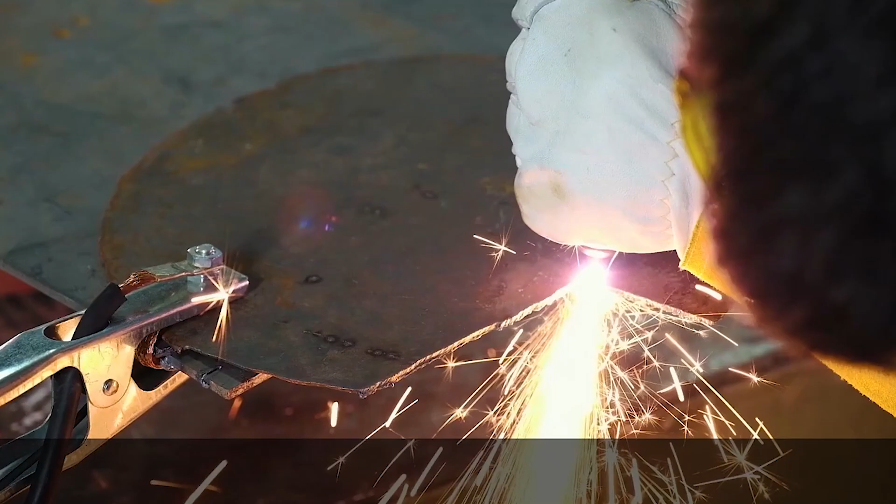Albert Welding presents 3-in-1, a multifunctional MMA, cut and TIG machine. This machine provides outstanding functionality and reliability. You can either cut with plasma, weld, or use TIG with just one single device. In each of these processes, the machine performs all the advantages of the inverter welder.

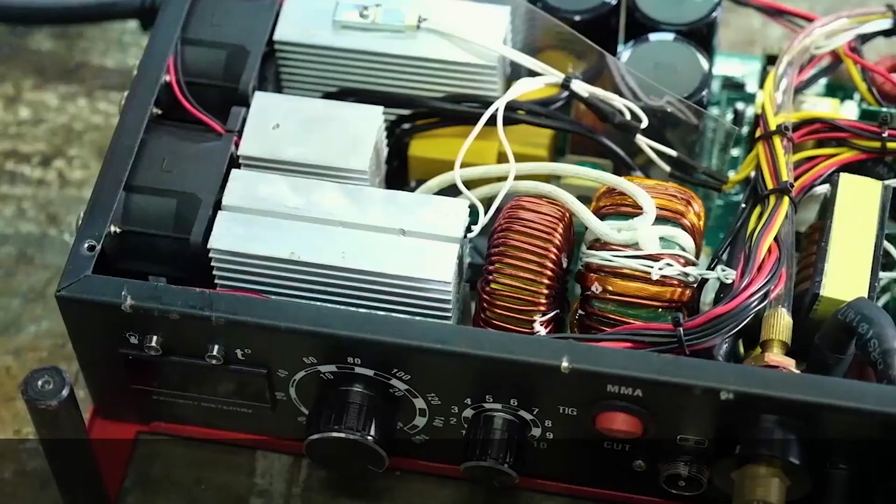Soft and stable arc during MMA. Powerful high-frequency injection unit provides soft and touch-free ignition at TIG. With high-frequency ignition for cut, you may even not touch the working metal.

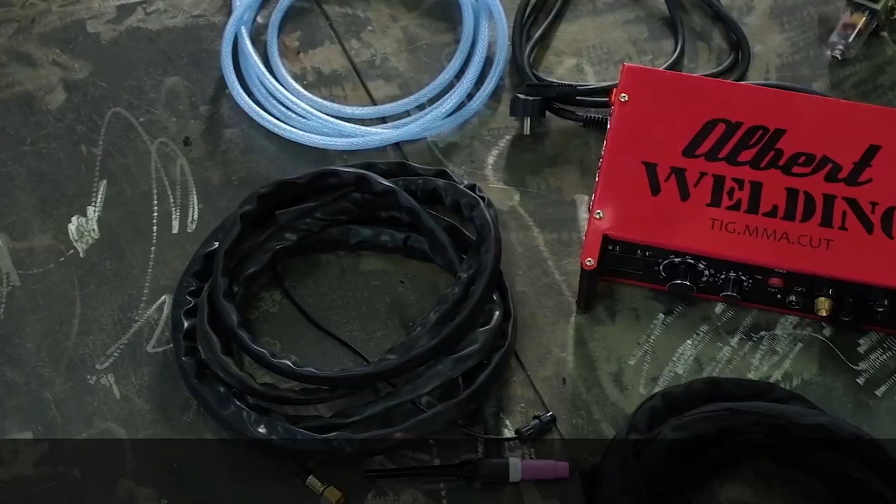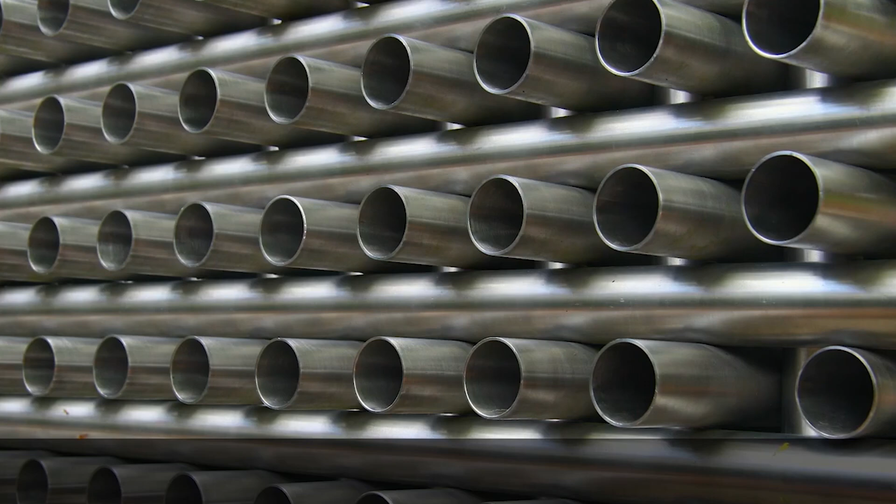It is easy to start using this machine immediately and in any field: car service, house building and construction, mechanical works or production. This machine may be useful for house maintenance office specialists, as it not only allows you to cut a workpiece, but also weld some metal structures made of steel, stainless steel or copper.

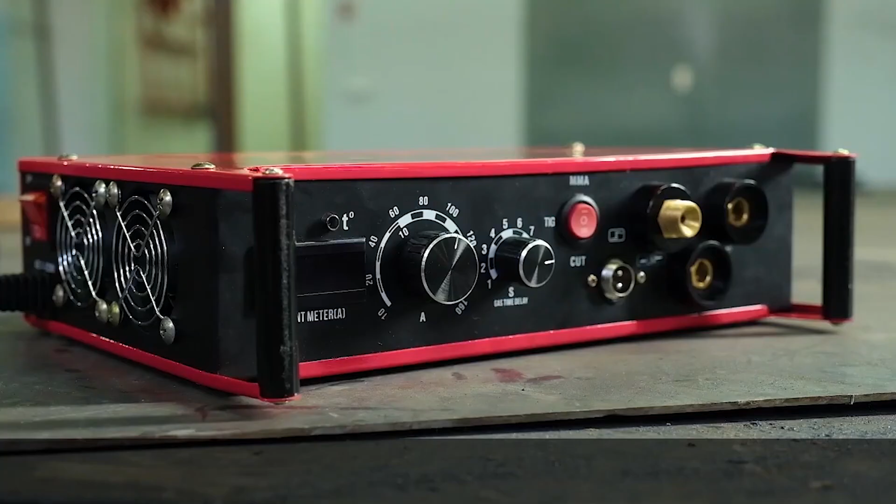Albert Welding 3-in-1 works with a regular mains power supply of 220 volts, which makes it possible to use it almost everywhere. Steady operation is maintained even if voltage drops down to 140 volts.

The weight of the machine is just 4 kilograms 600 grams. Machine overall dimensions: length 32.5 centimeters, width 29 centimeters, height 8 centimeters.

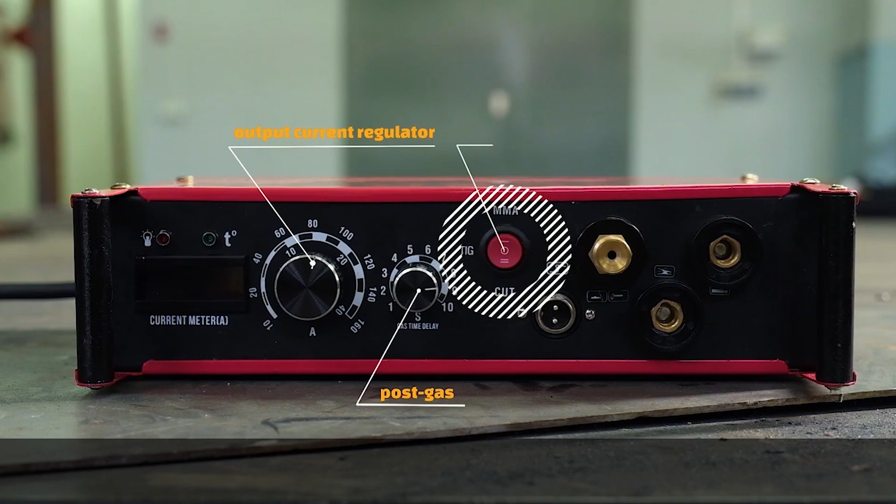On the front panel, you can see the output current regulator, post-gas function control regulator knob, which helps protect the beam from combustion at TIG, MMA, TIG, and cut switch knobs, output current display, power light, overheating and mains failure detection lights.

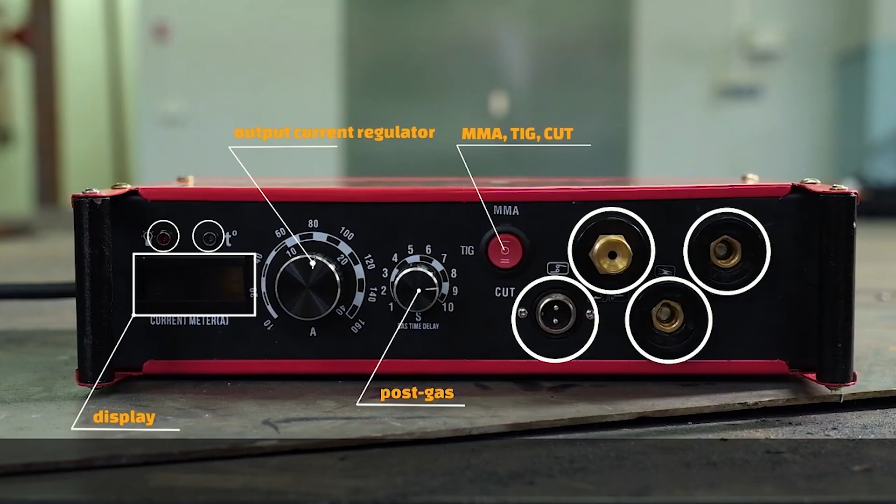On the right side of the front panel, you can see a quick detachable MMA connector, plasma cutter torch and TIG torch connectors, plasma generator and torch remote control connector. From the left and right of the front panel, you can also find shoulder strap holders. You can also use the carrying handle to easily move the machine around.

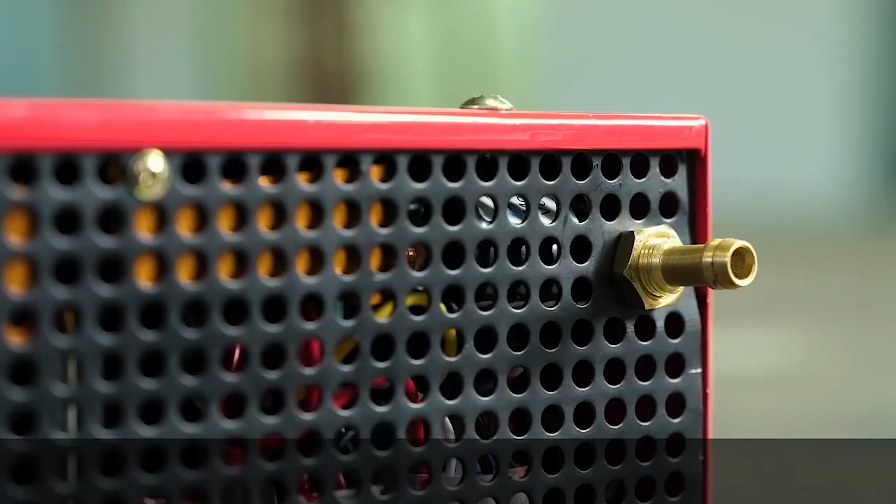On the left side of the machine, there are cooler grills and a power on-off button, as well as the mains cable input. On the right side of the device, you can find a pressure valve filter for the cut function, and argon input for TIG. Please note that to use the cut function, you would need to connect a small air pump. To ensure steady work, it would need just 4 to 5 bars of pressure.

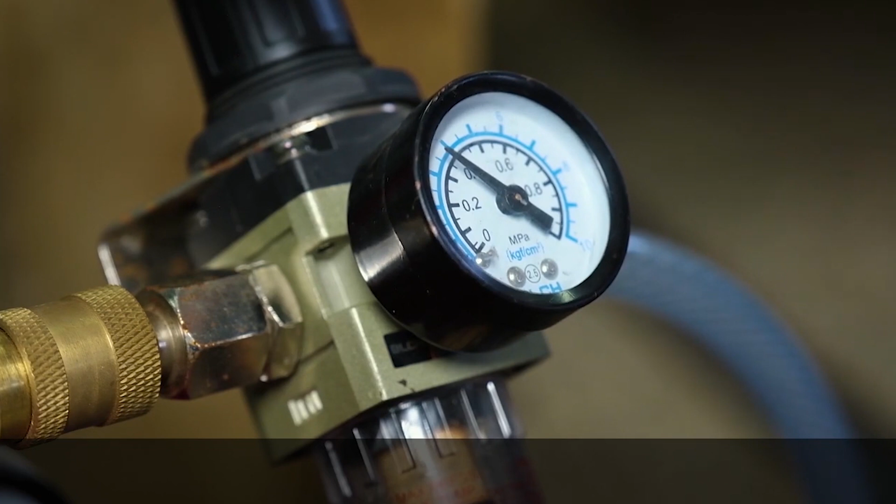Main specifications of Albert Welding 3-in-1: maximum output current, MMA 160 amps, cut 40 amps, TIG 160 amps.

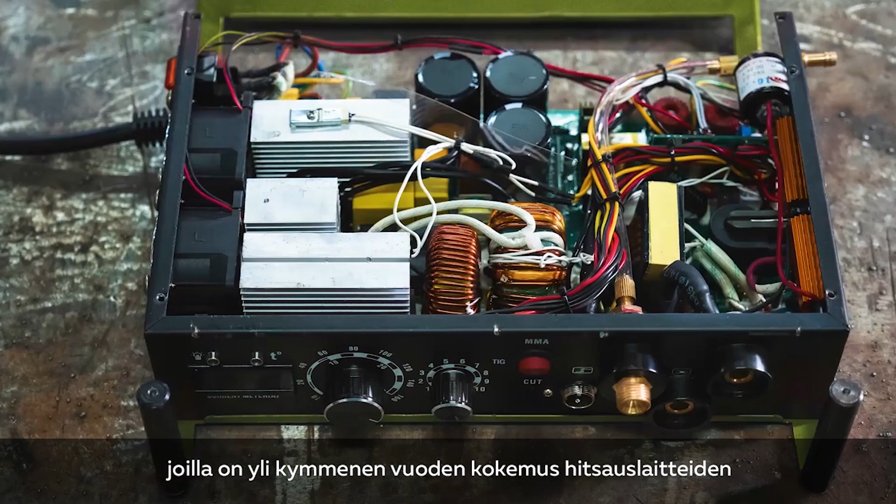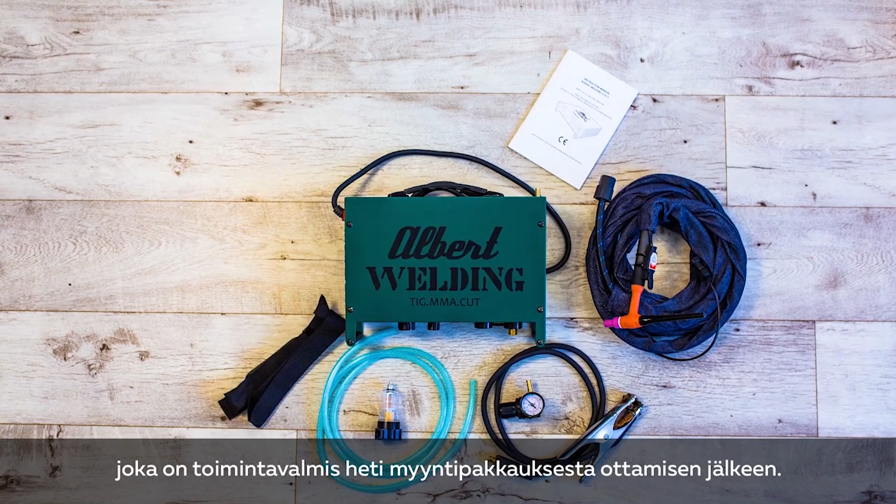Albert Welding is a team of professional engineers with over 10 years of experience in production of welding equipment. Since 2017, we raised our seed investments, registered our patents, and upgraded our prototype to a production model. Our engineers created a product which is ready to work right out of the box. Albert Welding 3-in-1 is a mature production model ready to be sold and marketed.

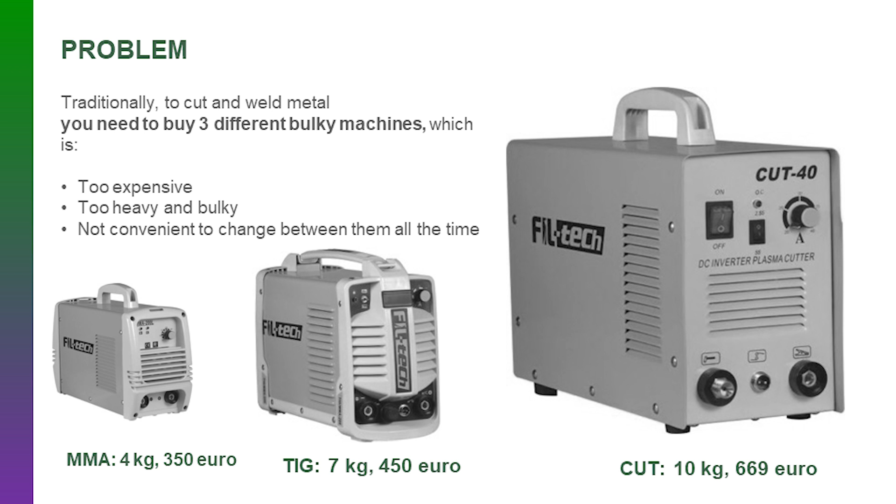Yeah, thank you. So, my name is Sergey, and today we're speaking about the future of metal welding and cutting. Today the problem is that to weld and cut metal you would need 3 different bulky and heavy machines, which is totally inconvenient to switch all the time between them and definitely very expensive.

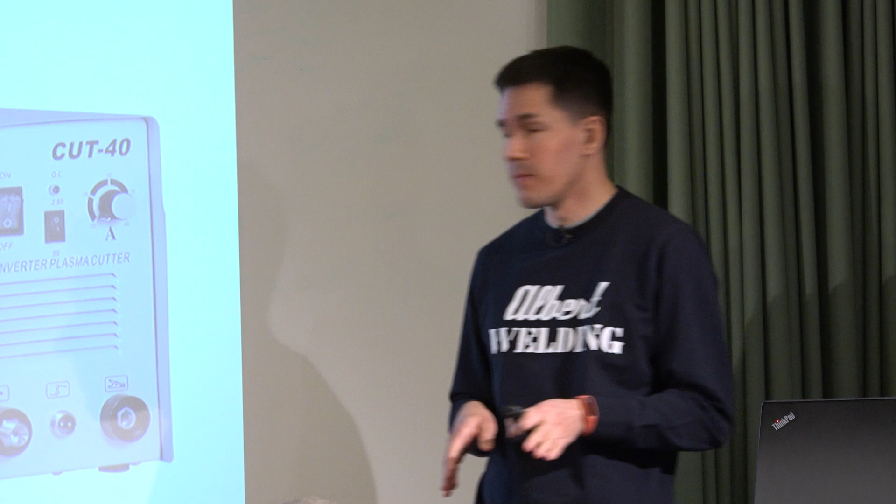But we have a solution. This is Albert Welding 3-in-1, patented technology, our proprietary technology, the most lightweight and portable 3-in-1 welding and cutting machine in the world right now.

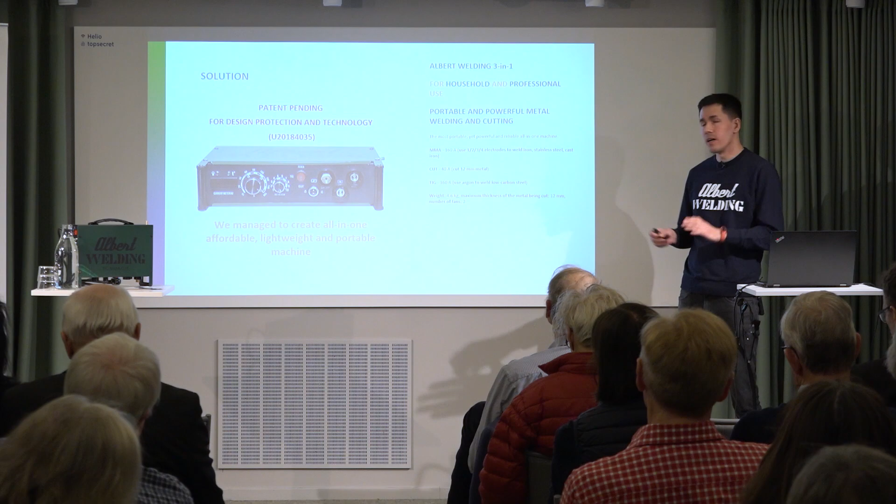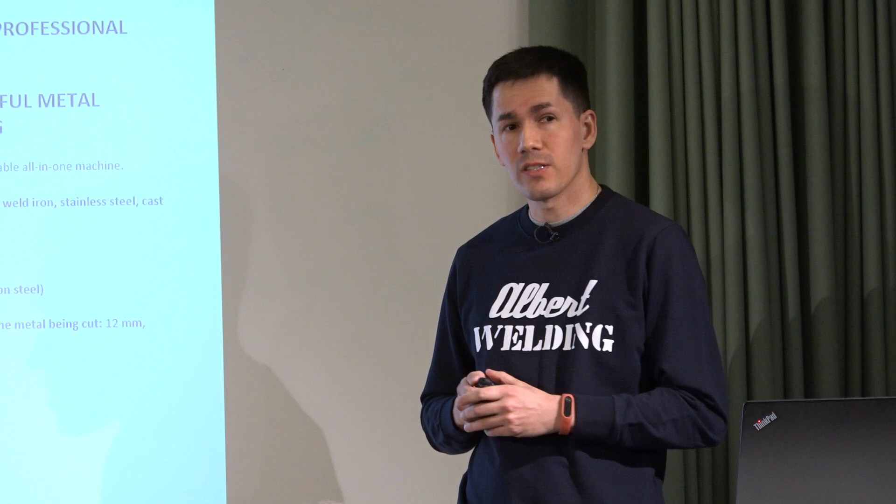There is no other machine, a 3-in-1 machine combining three different functions - welding and cutting functions in one - of the same size, same portability, and same lightweightness. It's just 4.6 kilograms, and you can wear it on your shoulder like a suitcase. It's very convenient. Practically, you can use it in any field.

From your private house, it works from a regular socket, 220 or 230 volts, at your house, anywhere, or on a regular supply or anywhere like a car service or shipyard, anywhere.

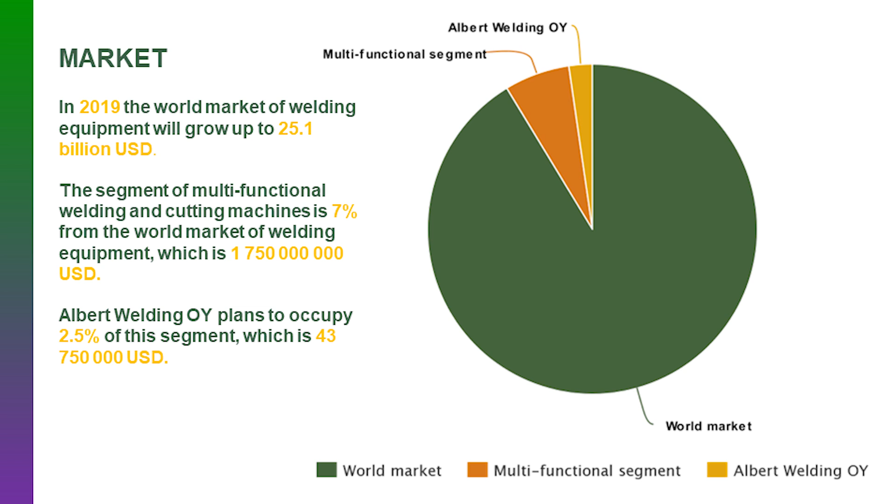Our market is pretty big. The total global market of welding equipment this year will become over $25 billion, and we are going to grab 2.5% of the smaller market of this segment with the multifunctional machines, which is over 43 million USD.

Our business model is pretty simple. We will be selling our machines through a network of existing distributors, like in Finland it is Motonet. You also have here the tools, Expondo, Biltema, etc. And we are also Kemppi, and we can do some OEM with several companies, like Fronius for example, and work like on white label with them.

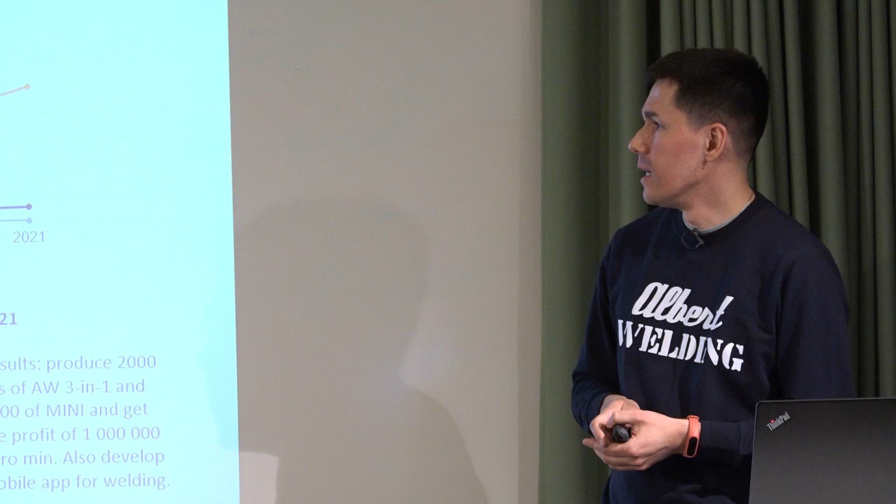We are based in Joensuu in Finland. We have registered the company there. In 2017, we registered our company and raised 150,000 euro. That was our initial seed investment.

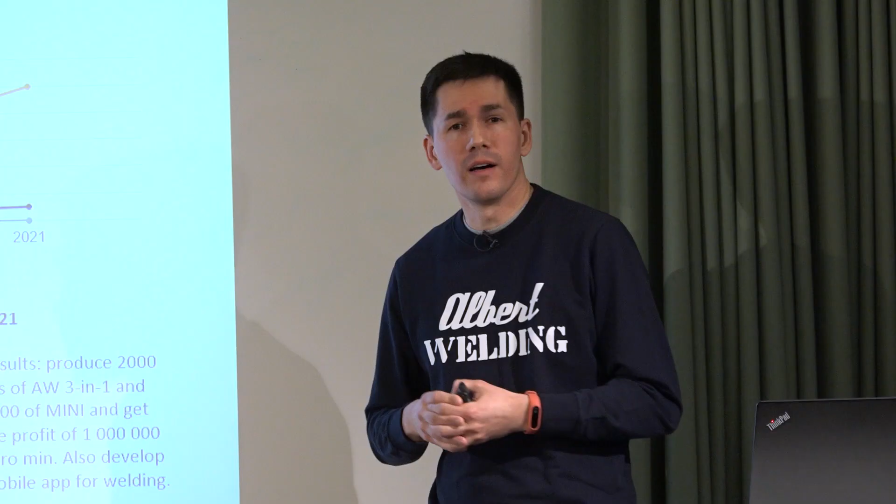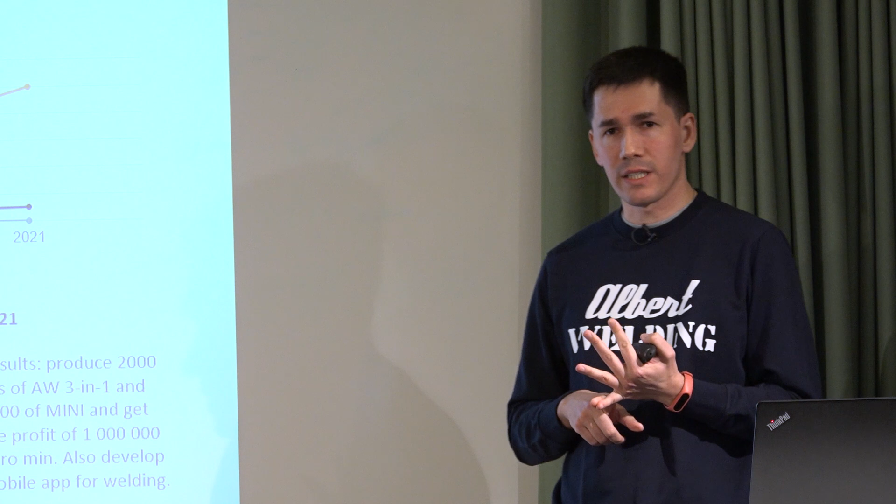From that time, we have the following traction: we have finalized everything concerning the patents. We patented our machine, our technology, protected our design, and registered our patents, the utility model, and we have finished our R&D, of course.

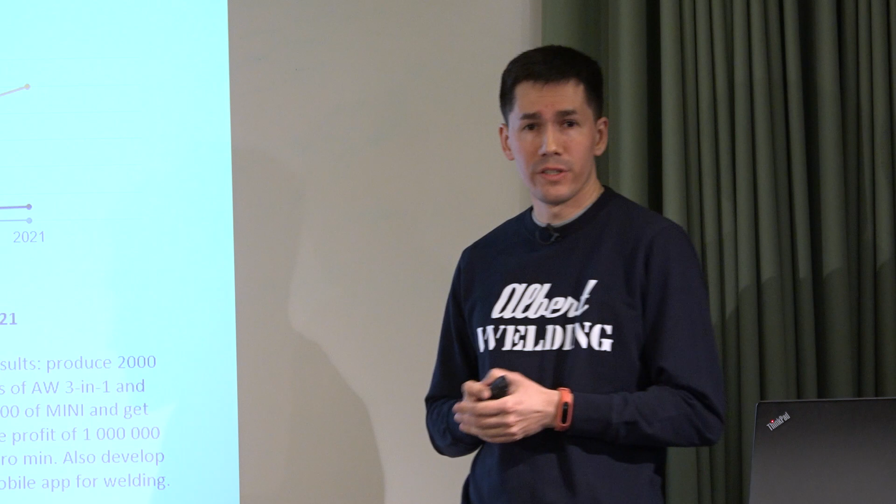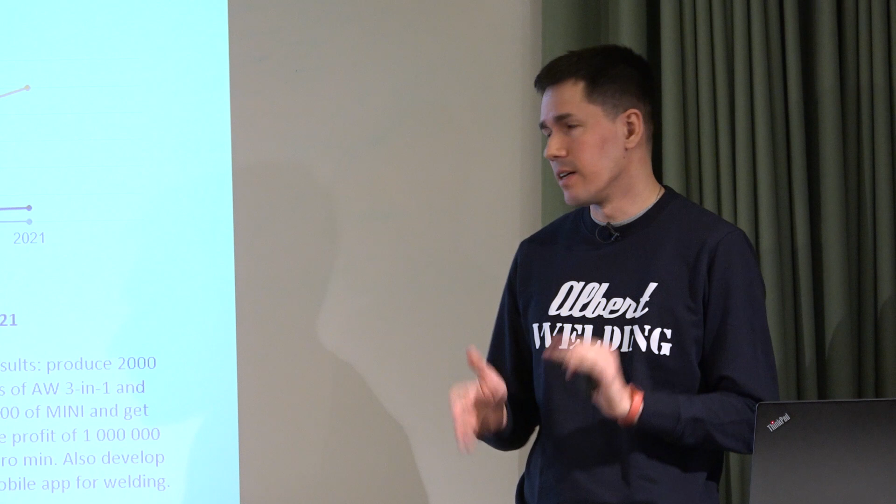At the moment, this year, our model is a fully scalable production model, so you can sell it immediately. This year we're raising 500,000 on the platform FundedByMe. So we invite you to join this round.

By next year we're going to get the profit already. This profit is indicated here, over 1 million euro. So we are immediately going to start getting profit.

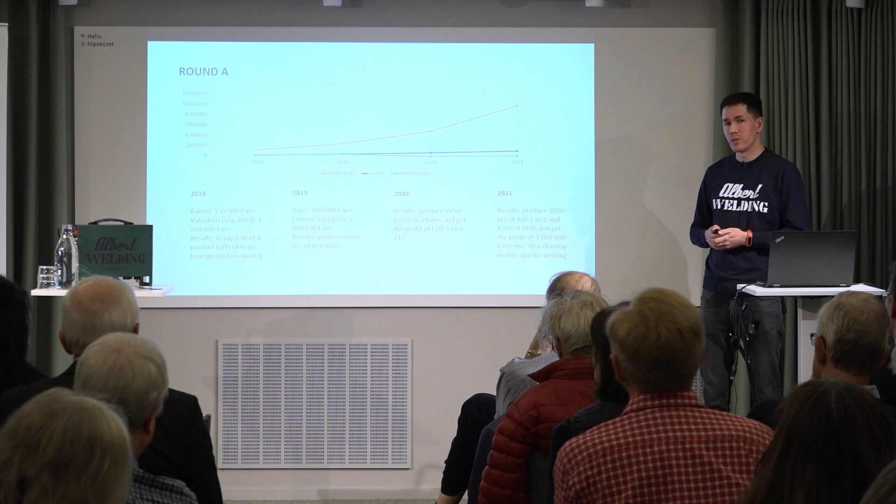Our current valuation is 2 million. This is our traction so far. So we are raising now, through FundedByMe or directly, 500,000 euro.

And how are we going to use this money? Of course, we are going to produce these machines. At the moment we're at the stage that we need to manufacture the batch, to ship it to, for example, Motonet or any other distributor.

And the second half of it will be spent on on-site and online promotion - in the shops, promotion in the shop. So when our machines are on the shelves, we will promote it in the shops and online. We already started negotiations with Motonet, and we're going to expand to Sweden, of course.

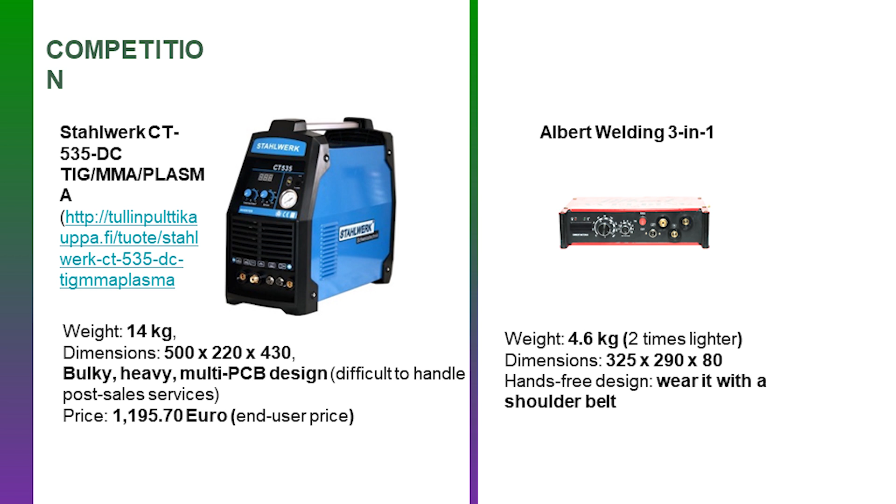Some words about our competition: all our competitors start at 14 kilograms, and you are not able to wear them on your shoulder. So we have the most lightweight machine in the world right now, and the most compact with comparable power.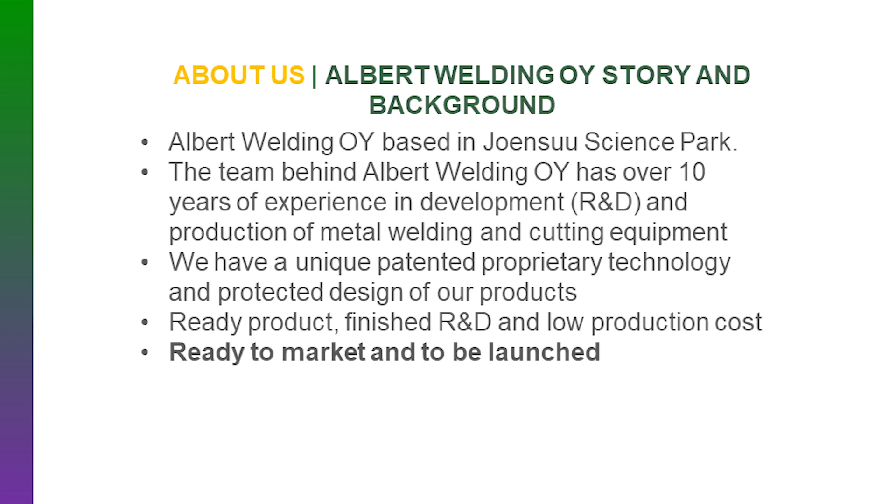This is our traction so far, and user advantages: low weight, 4.6 kilograms, small size, 3 different functions in one - MMA, cut, and TIG - with only one device.

Contrasting design, as you can see on the shelf, it contrasts. It's different on the shelf and very eye-catching. At every exhibition, everyone comes and asks, well, what's that? That's not a welder, that's maybe an amplifier. So everyone compares it to a small amplifier.

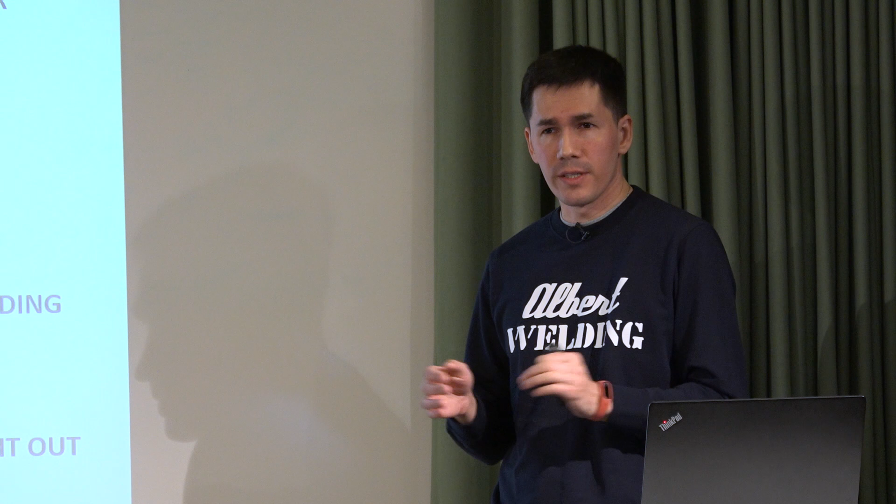It offers a great user experience - it's very easy to start working with it. You don't need to learn a welding course; anyone can start immediately. We also provide, in the box, all the accessories you would need, except for an air pump. If you want to cut with a plasma cutter, you would need the most simple air pump.

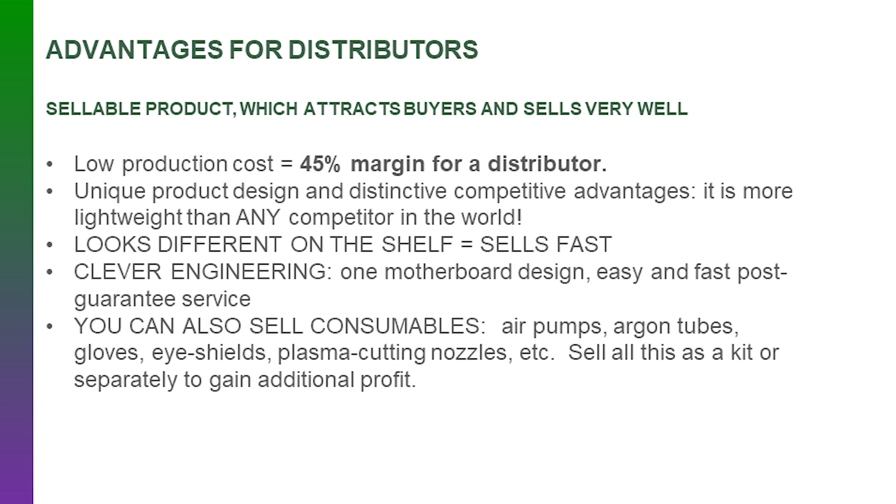For the distributors, most of our concentration during our R&D process was focused on the components, and we managed to decrease our initial production cost down to very low. And now we have a gap.

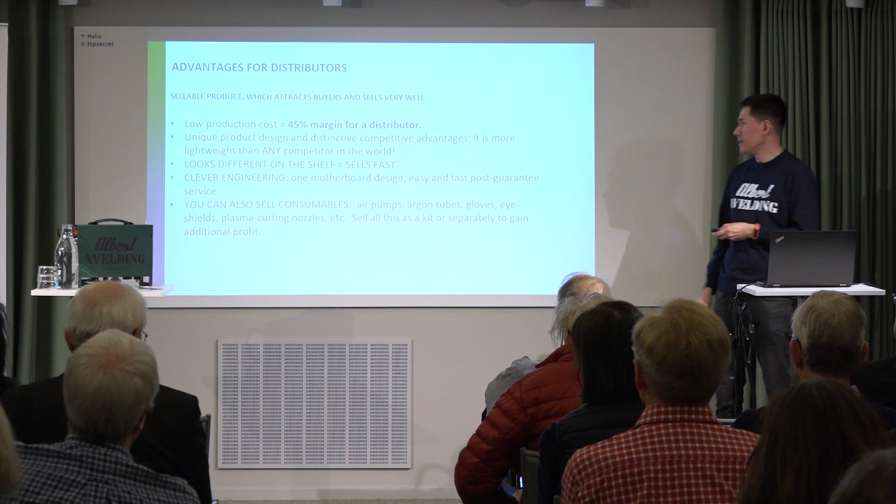It has a unique product design, it looks different on the shelf, as I've already mentioned, and it sells fast. We have some pre-orders already. For the distributors, they can also upsell, for example, those air pumps already, so they have more income coming because of our device, because of our product.

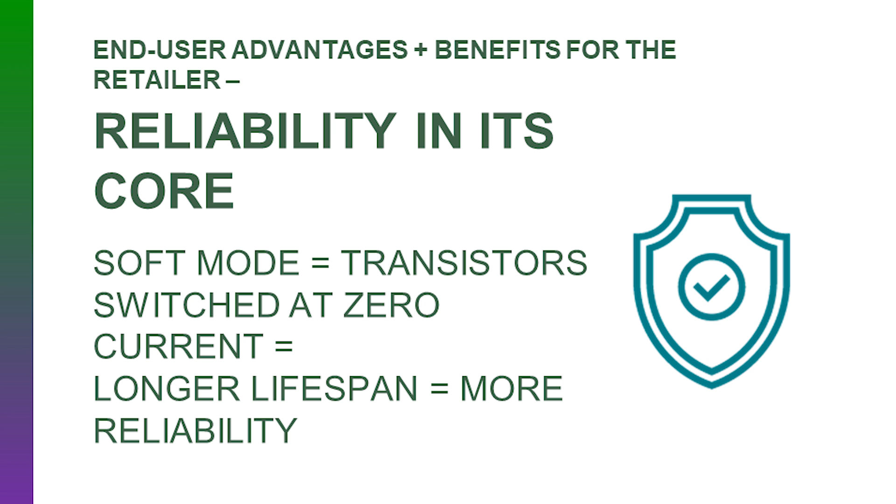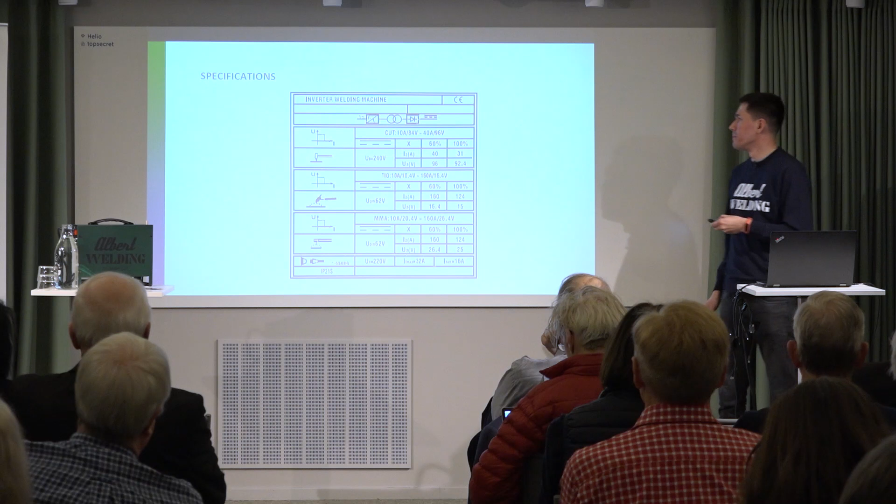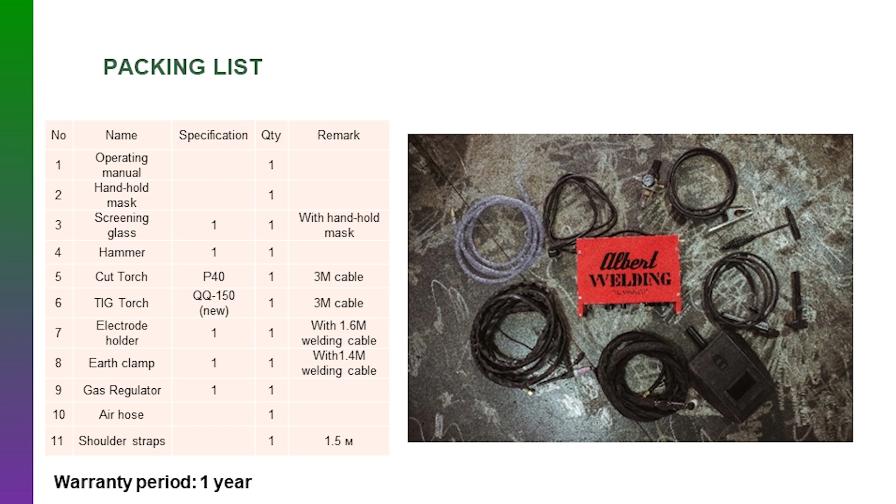These are our specifications, and this is the packing list. You can check what's inside — a mask, all the welding cables, everything you would need to start immediately. Yes, that's it. Your questions, please. Thank you, Sergey.

Looking at this one, yeah, it's very easy. How come no one has made such a small, easy welder before?

Yes, that's an interesting question. First of all, our team has over 10 years of experience in production of welding equipment, so that's a very long story from the point of view of R&D. We have been developing this model for over 3 years.

So if some bigger company wants to copy this — of course, they can copy this, but first of all, we protected it significantly, and secondly, it will take them around 3 years, and they will compare the cost of this R&D and analytics with the income they might get, and why do they need it? They already have their bigger products. They won't risk it.

And by the way, we have protected our technology from the point of view of manufacturing. We manufacture in China — the hardware is assembled in China — but finally we have a calibration process which is made in Finland. So only our team, our own proprietary team, knows at the final stage how to tune this machine.